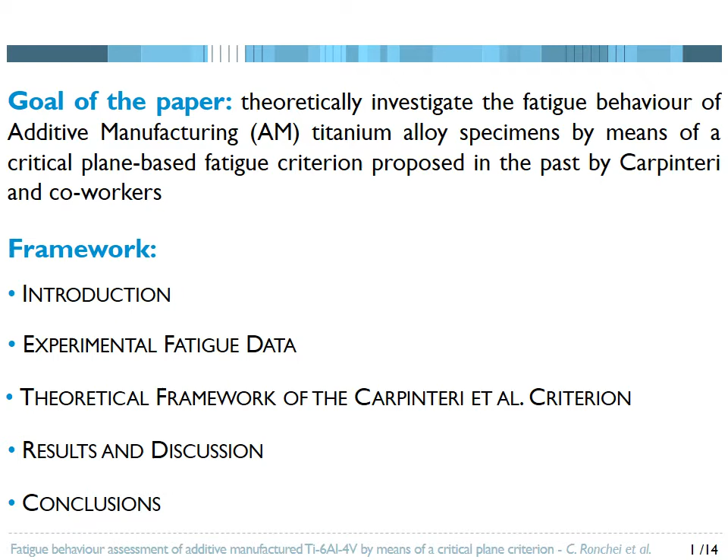My presentation consists of the following sections: introduction of the fatigue behavior of AM metallic components under constant amplitude cyclic loading, description of the examined experimental fatigue data, description of the theoretical framework of the Carpinteri et al. criterion, presentation of the results and discussion, and finally, conclusions.

Nowadays, AM is a widespread technology employed to realize complex geometries with a significant reduction of fabrication time with respect to traditional manufacturing methods. Moreover, AM process allows to reduce the weight of the components without joining and welding operations needed when using conventional techniques. Thanks to these advantages, the AM technology has become popular in many industries such as aerospace, automotive, and biomedical.

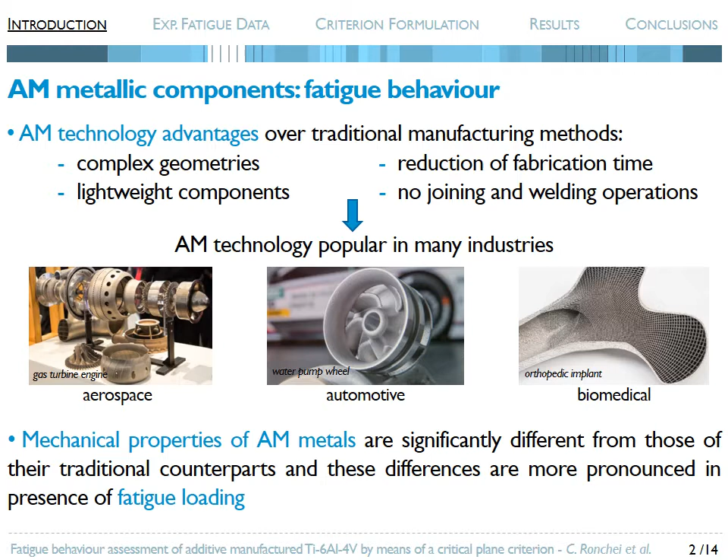As is well known, the mechanical properties of AM metals are significantly different from those of their traditional counterparts, and these differences are more pronounced in presence of fatigue loading. In particular, AM metals experience shorter fatigue lives in comparison to the same metals produced by means of conventional techniques, due to the presence of both internal defects, porosity and lack of fusion, residual stresses, and high surface roughness, which are material inherent features deriving from the manufacturing process.

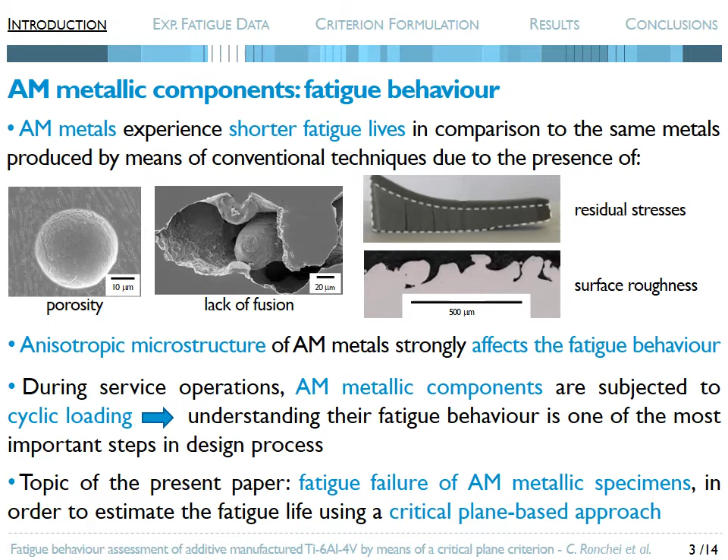Moreover, also the anisotropic microstructures of AM metals, caused by high thermal gradients occurring during the building process, strongly affect the fatigue behavior. During service operations, AM metallic components are subjected to cyclic loading. Consequently, understanding their fatigue behavior is one of the most important steps in design process in order to avoid catastrophic failures. In such a context, the present paper is on fatigue failure of AM metallic specimens in order to estimate the fatigue life using a critical plane-based approach.

In particular, the fatigue tests examined are related to an experimental campaign recently performed by Molaei and co-workers on specimens made of AM titanium alloy Ti-6Al-4V. Such specimens were produced by using a laser beam-based powder bed fusion machine with the fabrication process parameters listed in the table on the bottom. The material employed in the manufacturing process was a gas atomized Ti-6Al-4V powder with a particle size range of 15-45 micron. The chemical composition of such a powder is reported in the table on the top.

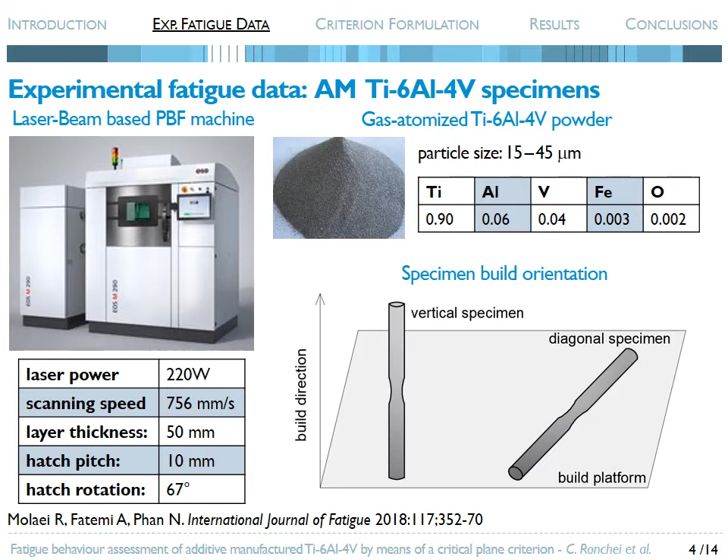The specimens were built with an orientation of both 90 degrees, named vertical specimens, and 45 degrees, named diagonal specimens, with respect to the build platform. All fatigue tests were performed on thin-walled tubular specimens with the geometrical sizes reported in the present figure. After manufacturing, AM specimens were machined in order to reduce the surface roughness according to the ASTM standard, that is, less than 0.200 micron. Then, such specimens were subjected to a post-processing heat treatment under high pressure, named hot isostatic pressing, HIP, which allows closing the internal defects and relaxing the tensile residual stresses.

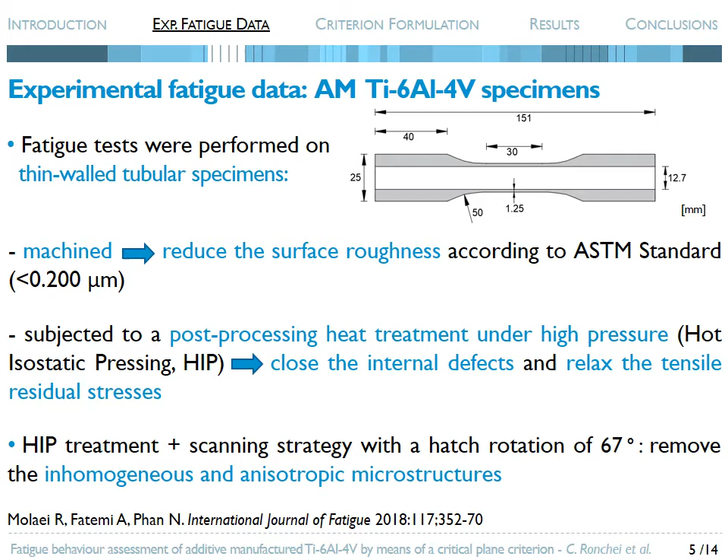Such a treatment, together with the above scanning strategy consisting in a hatch rotation of 67 degrees, are able to almost completely remove the inhomogeneous and anisotropic microstructures of the present material. Fatigue tests were performed under both strain control and load torque control modes on vertical and diagonal specimens. The experimental loading conditions consisted in tensile, torsional, and combined tensile-torsional loading with a phase shift beta equal to 0 or 90 degrees, with the fatigue ratio R equal to -1.

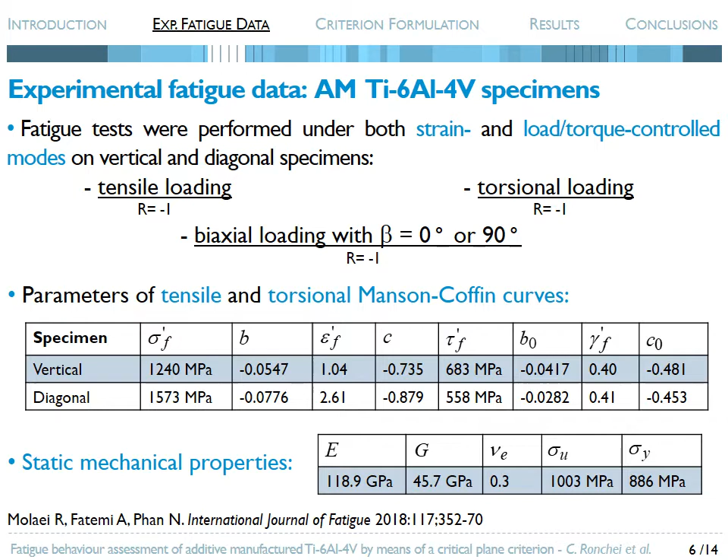The parameters of the tensile and torsional Manson-Coffin curves were derived from the uniaxial fatigue data as listed in the table on the top. Moreover, the static mechanical properties derived by means of static tensile and torsional tests are reported in the table on the bottom. The above fatigue tests are hereafter simulated through the critical plane-based fatigue criterion proposed by Carpinteri and co-workers. Before presenting the detailed formulation of such a criterion, some remarks on its application to AM metals are needed.

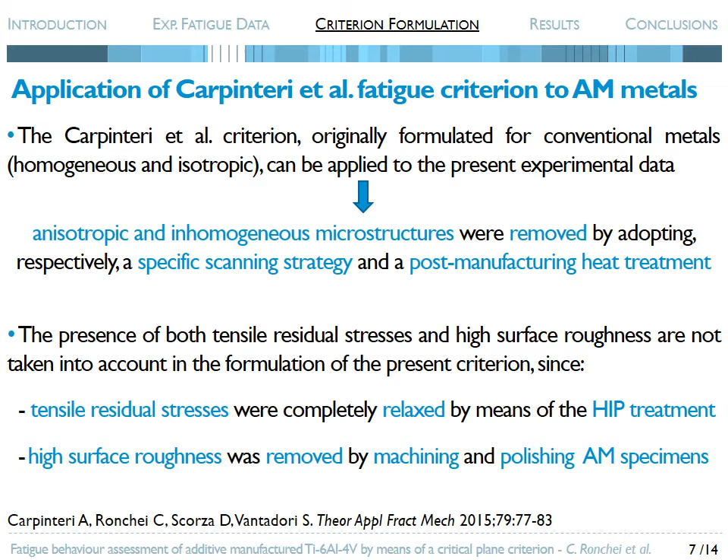As a matter of fact, the Carpinteri et al. criterion, originally formulated for conventional metal, that is homogeneous and isotropic, can be applied to the present experimental data, since the anisotropic and inhomogeneous microstructures of the present AM metal were removed by adopting, respectively, a specific scanning strategy and a post-manufacturing heat treatment. Moreover, the presence of both tensile residual stresses and high surface roughness, which are peculiar features of AM metals, are not taken into account in the formulation of the present criterion, since tensile residual stresses were completely relaxed by means of the heat treatment. High surface roughness was removed by machining and polishing the AM specimens.

According to the Carpinteri et al. criterion, the fatigue life assessment is carried out at a verification point, P, located on the specimen's surface. Once the strain state at point P is deduced, the average directions of the principal strain axes are determined on the basis of their instantaneous directions by means of the average principal Euler angles phi with cap, theta with cap,

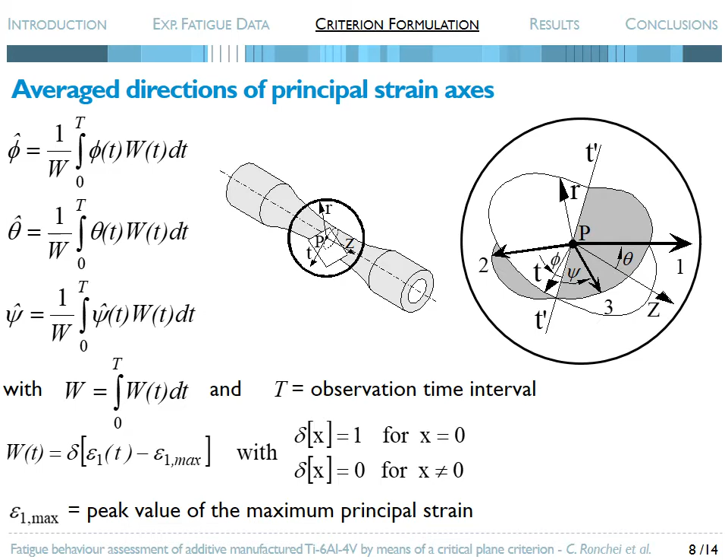and psi with cap. By adopting the weight function W here reported, the average principal strain axes, 1 with cap, 2 with cap, and 3 with cap, coincide with the instantaneous ones at the time instant when the maximum principal strain epsilon1 attains its peak value over the loading cycle.

Then the orientation of the critical plane, which is the verification plane for fatigue life evaluation, is defined by taking an off-angle delta in the principal average plane 1 with cap, 3 with cap. Rotating counterclockwise the average direction 1 with cap by the off-angle delta, we obtain the normal W to the critical plane. The off-angle delta is assumed to be expressed as follows, where nu-eff is the effective Poisson ratio and epsilon a and gamma a are defined by the well-known tensile and torsional Manson-Coffin equations, respectively.

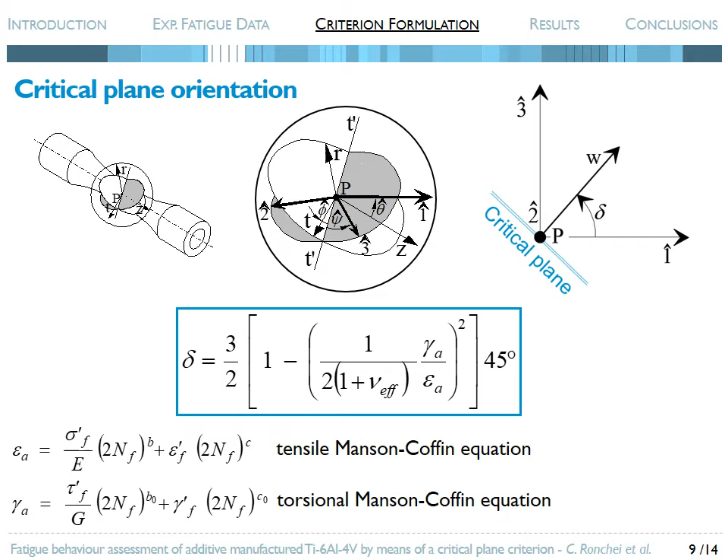Now let us consider the local reference system PUVW attached to the critical plane. The strain tensor related to both the verification point P and the above critical plane orientation can be computed, and consequently the corresponding displacement vector eta is determined. Such a vector is decomposed into a normal vector eta n and a tangential vector eta c.

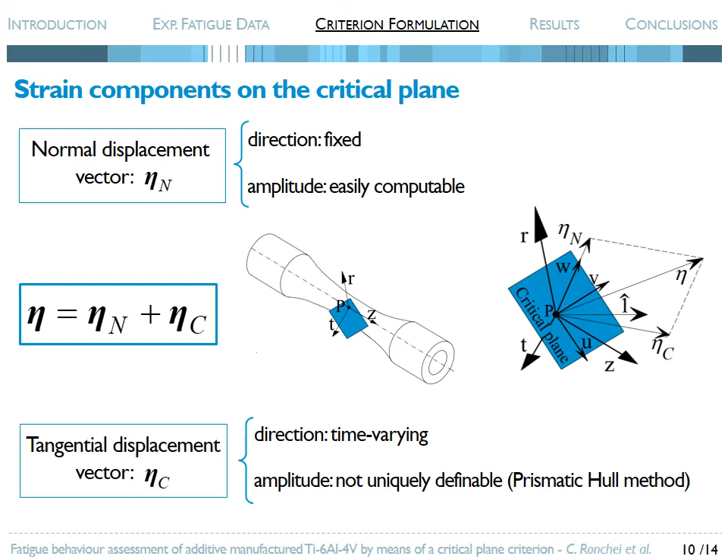Since the direction of the normal vector eta n is time invariant, the corresponding amplitude in a loading cycle can easily be computed. On the other hand, the direction of the tangential vector eta c changes during a loading cycle, and the definition of the corresponding amplitude is not unique. In the present paper, such an amplitude is evaluated by using the prismatic hull method.

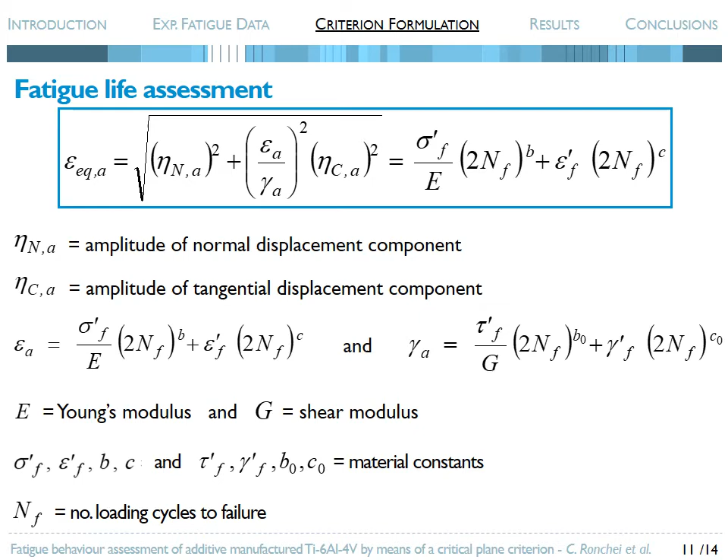Finally, the fatigue life is assessed through an equivalent strain amplitude together with a unique material reference curve, that is the tensile Manson-Coffin curve. More precisely, the above equivalent strain amplitude is expressed by a quadratic combination of the amplitudes of both the normal and the tangential displacement vectors acting on the critical plane. The number of loading cycles to failure, NF, can be worked out by solving the above equation with an iterative procedure.

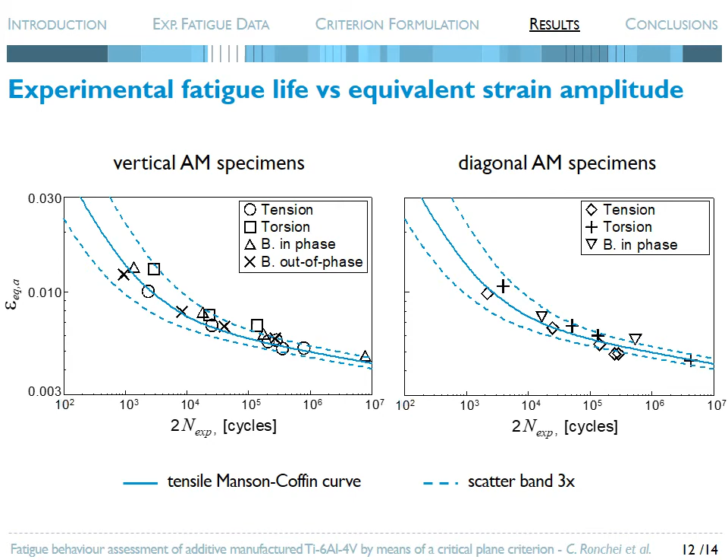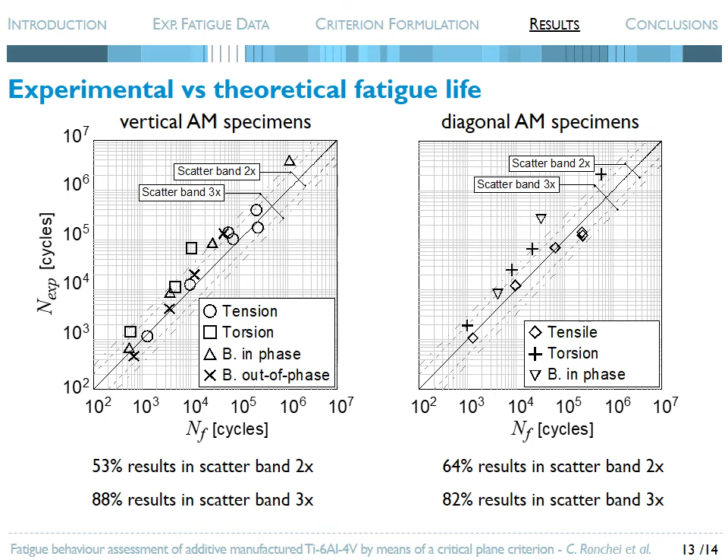In particular, the following remarks can be made. For vertical AM specimens, 53% of the results fall within the scatter band 2x, whereas 88% of the results fall within the scatter band 3x. For diagonal AM specimens, 64% of fatigue life calculations are included in scatter band 2x, whereas 82% of such calculations are included in scatter band 3x. Moreover, when the theoretical results are located outside the above scatter bands, they are on the conservative side.

And now let us move to the conclusions. In the present research work, the fatigue behavior of AM Ti-6Al-4V specimens under both uniaxial and biaxial cyclic loading has been theoretically investigated. In particular, fatigue tests available in the literature have been simulated by means of a critical plane-based fatigue criterion proposed in the past by Carpinteri and co-workers. Even if the present paper represents a first attempt to apply such a criterion to AM metals, the obtained results in terms of number of loading cycles to failure are satisfactory, falling mostly into scatter band 3x.

Based on the above results, the Carpinteri et al. criterion seems to be capable of accurately estimating the fatigue life of AM metals as well. However, further investigations are needed in order to theoretically take into account the presence of both tensile residual stresses and high surface roughness in the criterion formulation.